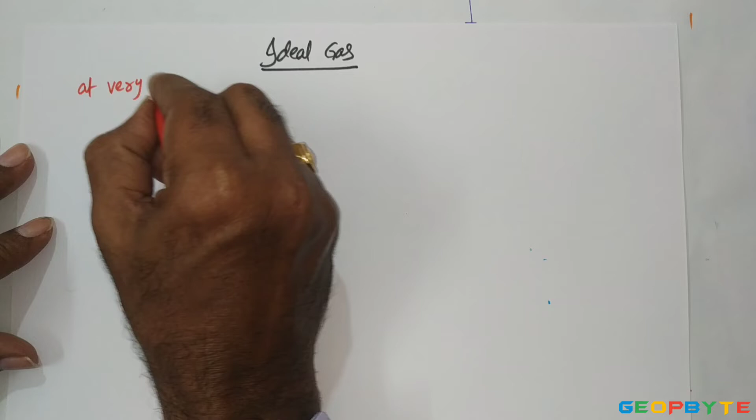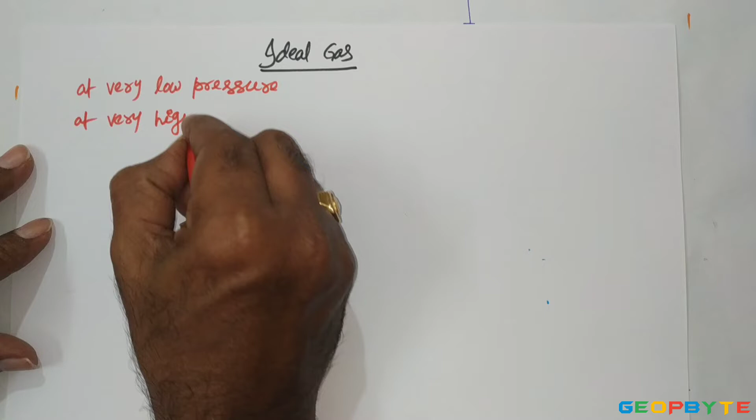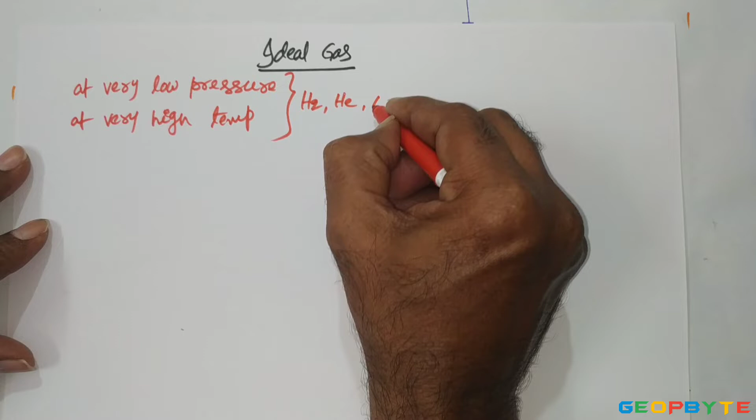But comparatively at very low pressure and at very high temperature, there are certain gases like hydrogen, helium, nitrogen, oxygen, argon and atmospheric air. These 6 gases maintain behavior very similar to ideal gas.

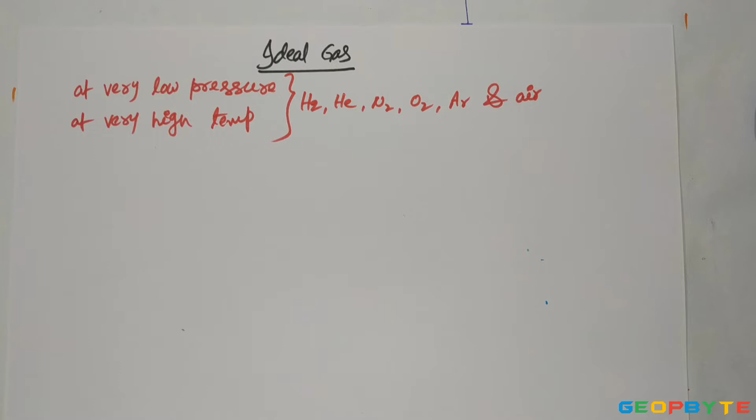Remember, these gases' behavior is very similar to ideal gas behavior only at very low pressure and very high temperature. But if I take these gases either at NTP, normal temperature and pressure, or STP, standard temperature and pressure, the behavior of these gases is also very similar to real gas. So anyhow, comparatively at very low pressure and at very high temperature, hydrogen, helium, nitrogen, oxygen, argon and atmospheric air maintain behavior very similar to ideal gas behavior.

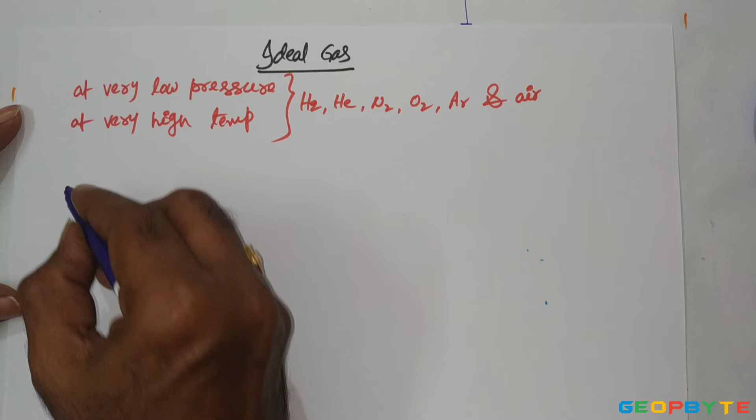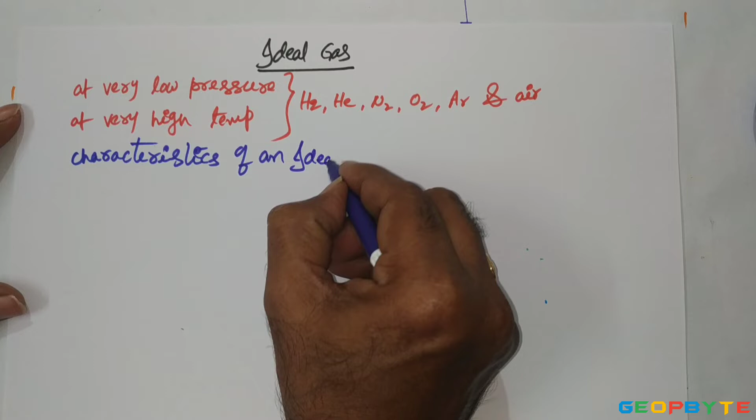Now let us discuss the characteristics of ideal gas. Characteristics of an ideal gas.

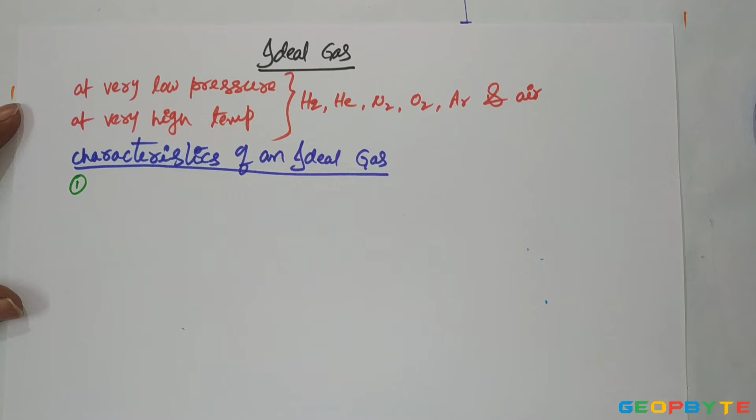The first character is that the molecular force of attraction is 0 in the ideal gas. That means ideal gas molecules are maintaining 0 attractive force or 0 cohesive force.

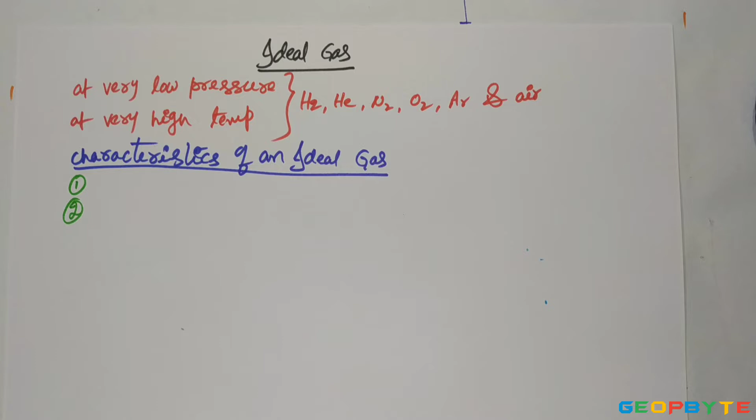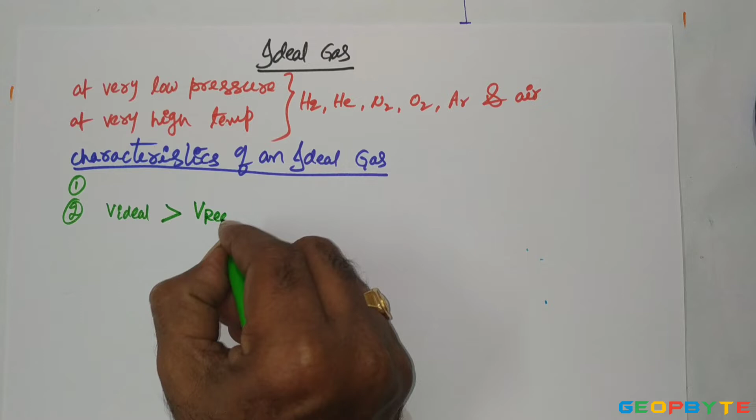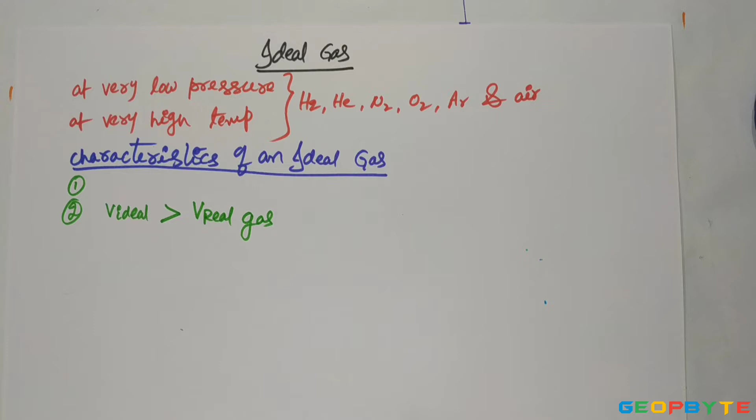Second character: since the ideal gas molecules are maintaining 0 controlling force or molecular force of attraction is 0, the molecules present in the ideal gas are very freely migrating from one location to another location. Because of that free migration, the volume occupied by ideal gas is always more than that of real gas.

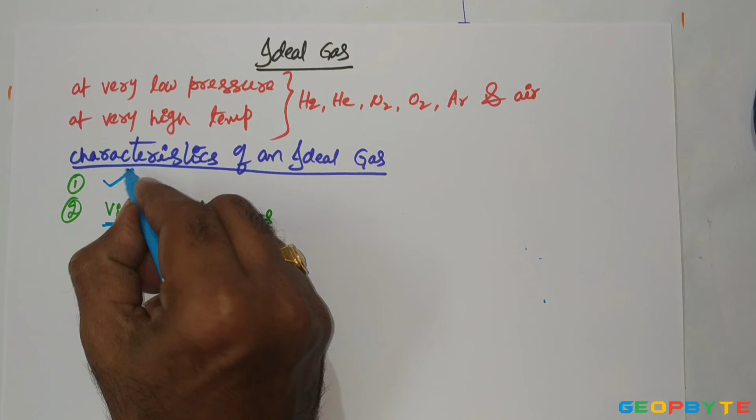First character is, there is no attractive force between the molecules of the ideal gas. Second character is, ideal gas is maintaining more volume than real gas.

Next character: by the time the ideal gas molecules are freely migrating from one location to another location, the molecular collision rate is more. That collision rate is developing some resisting force. That resisting force per unit area is called pressure. The pressure maintained by the ideal gas is more than that of real gas. Because of the free migration in the ideal gas molecules, the collision rate is more, and that collision develops some resisting force between the gas molecules, which per unit area is called pressure. The pressure developed by the ideal gas is always more than that of real gas.

Remember, in the ideal gas, if molecular force of attraction is beginning, the pressure of that gas is decreasing. Very important point. Next character.

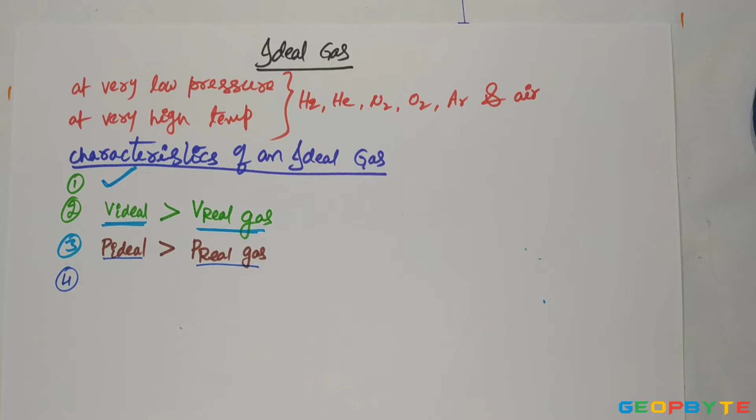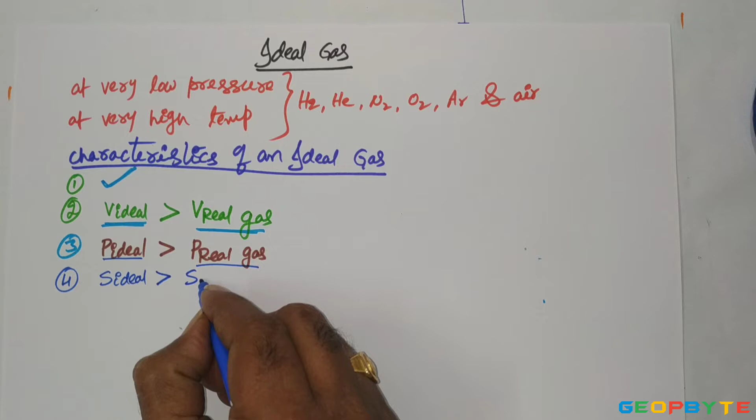Because the molecular force of attraction is zero in the ideal gas, the molecules present in the ideal gas move more disorderly, meaning the entropy maintained by the ideal gas is always more than that of real gas. That is the fourth character. Since the molecular force of attraction is zero, the molecules migrate more freely and disorderly from one location to another, and because of that free migration with a more disordered manner, the entropy maintained by the ideal gas is always more than that of real gas.

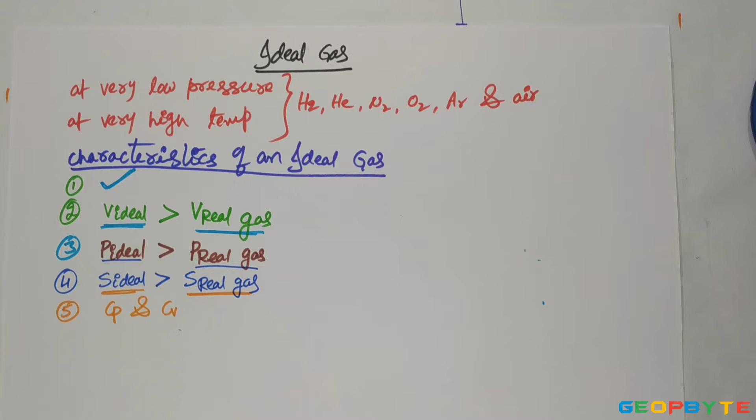Next character: the ideal gases can maintain constant specific heats, namely specific heat at constant pressure and specific heat at constant volume. Once again, ideal gases can maintain these constants irrespective of the pressure and temperature.

Next character, the last one: ideal gases never undergo phase change. Let us take water as an example. If I keep heating the water, initially the temperature of the water increases until it reaches the boiling point.

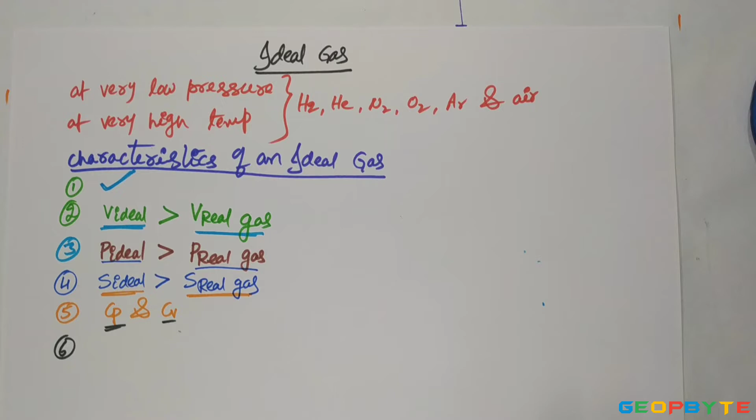But once the water reaches boiling point, because of further heating, water starts evaporation. Evaporation is the phase change from liquid to vapor. Such kind of phase change never occurs in the ideal gas under normal conditions. No phase change in the ideal gas under normal conditions.

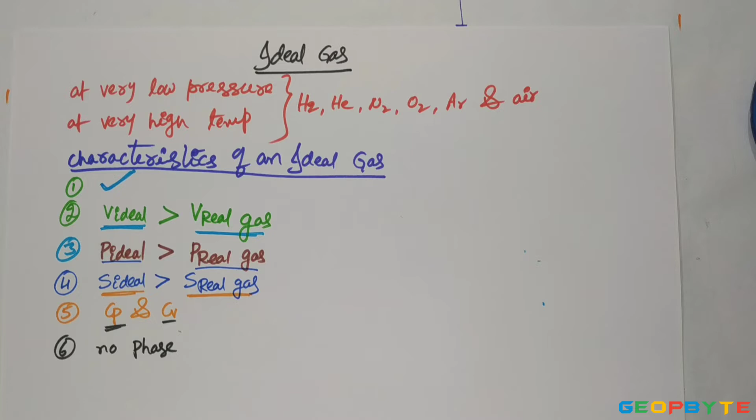So these are all the characteristics of the ideal gas. Now let us discuss the important laws for ideal gas. Important laws for ideal gas are Boyle's law, Charles' law, Joule's law, Regnault's law, Avogadro's law. These are all the ideal gas laws. If any gas is satisfying all these gas law principles at any temperature and pressure, that gas is treated as ideal gas or perfect gas.

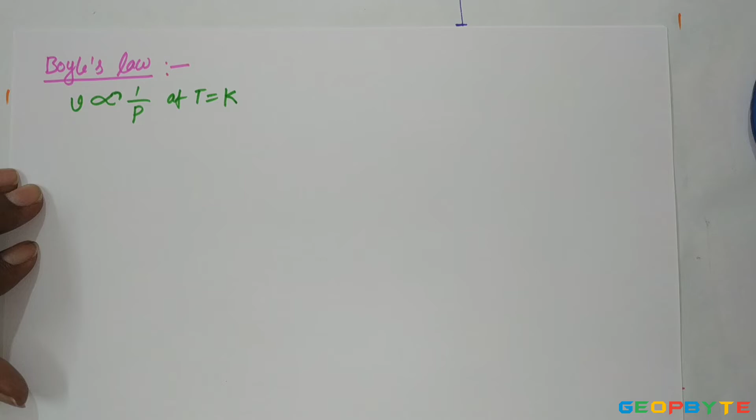The very first law is Boyle's law. Boyle's law states that the volume of the given mass of an ideal gas is inversely proportional to its absolute pressure when the temperature is maintained constant. It means if we can maintain the constant temperature for any ideal gas, volume is always inversely proportional to pressure. From this I can write that pressure multiplied by volume is proportional to 1, or pressure multiplied by volume is equal to a constant.

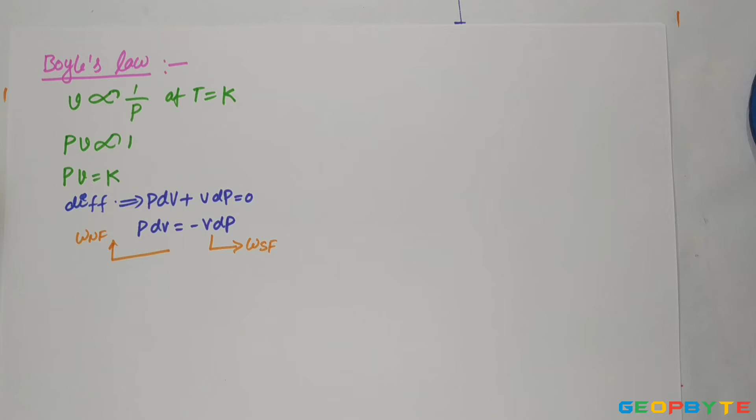That means product of pressure and volume remains constant for an ideal gas at constant temperature. From this, if I differentiate it on both sides, I am getting PdV plus VdP is equal to 0, or PdV equal to minus VdP. As we know, PdV is the non-flow work part, minus VdP is the steady flow work part. From this, the moral is non-flow work and steady flow work: this part is equal to non-flow work part, this is the non-flow work part, whereas this is equal to steady flow work. The moral is both steady flow work and non-flow work are identical for isothermal process.

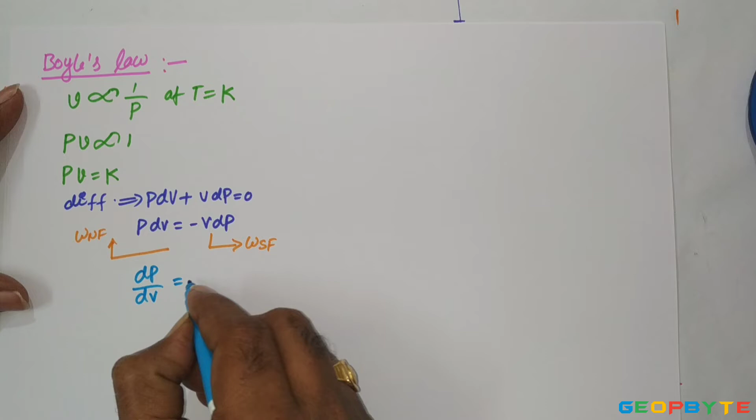Next, from this I can also write dP by dV is equal to minus P by V. The quantity dP by dV is the slope of isothermal curve with PV coordinate system. Once again, the quantity dP by dV indicates the slope of the isothermal curve with PV coordinate system. It is equal to minus P by V. The negative sign represents that isothermal process may support either compression or expansion.

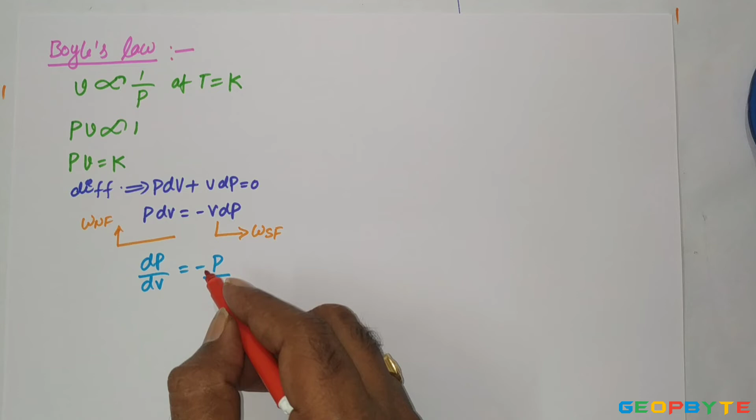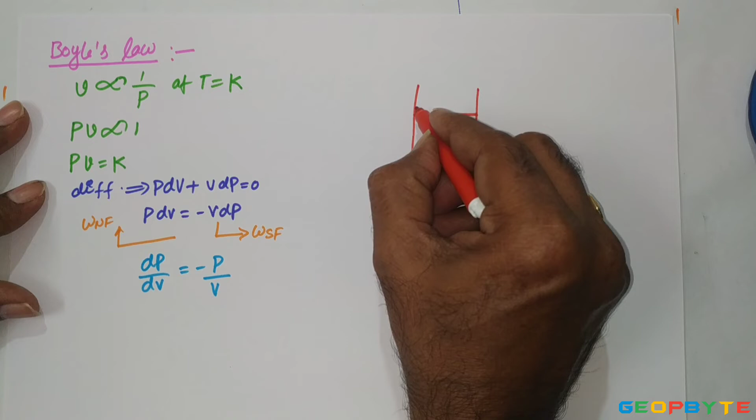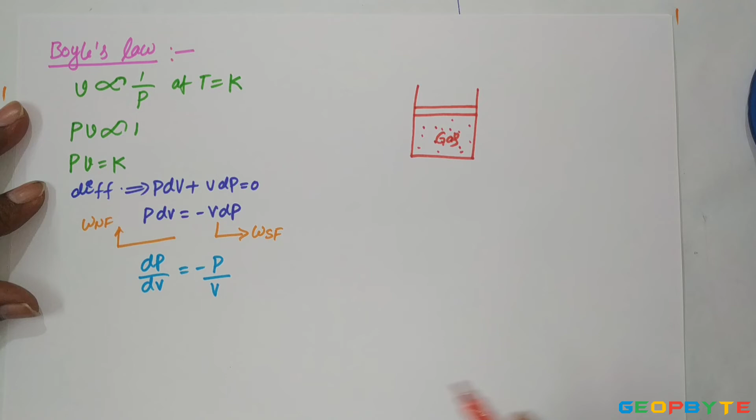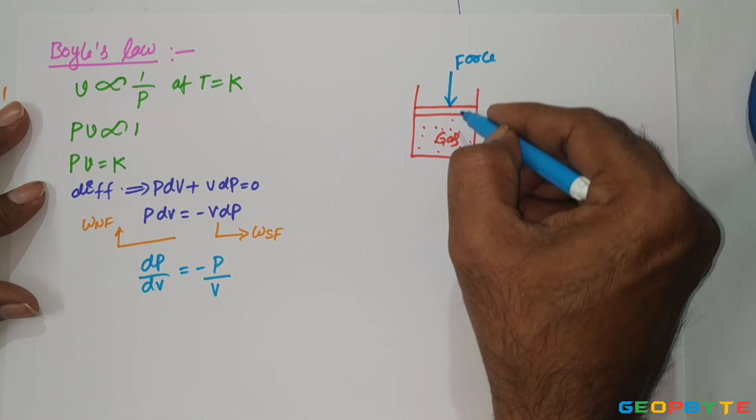Isothermal compression can be possible like this. Let us take the cylinder with piston mechanism. This space may be covered by some gas. Now, when I apply some external force on the piston, the gas below the piston is compressing. During the compression process, pressure increases. Along with pressure, temperature is supposed to increase. But if you want to maintain the constant temperature, you should arrange a cold source surrounding the cylinder. Let's see the water jacket or water source.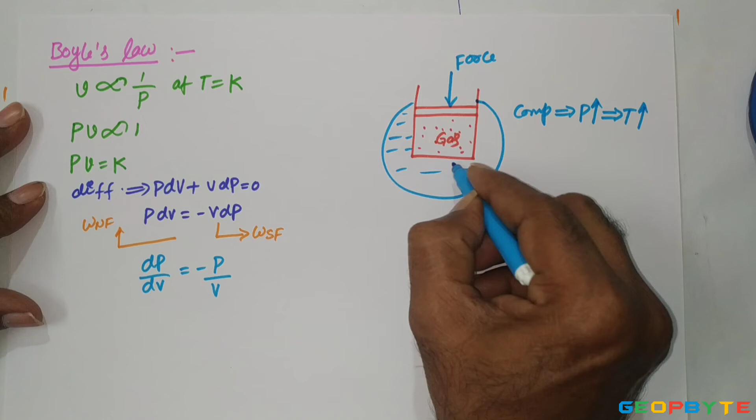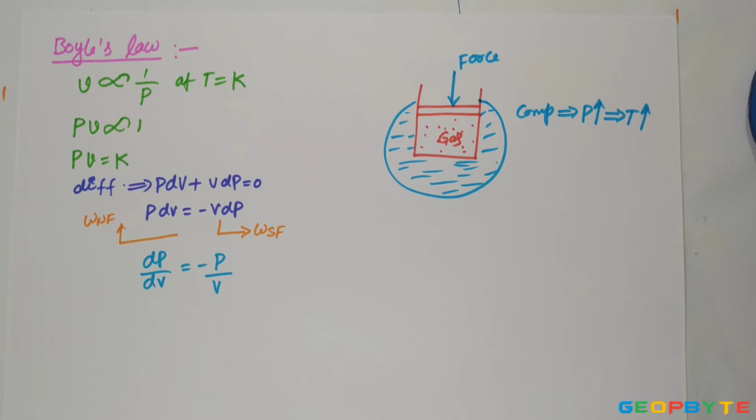In thermodynamics, hot source, cold source, hot body, cold body are four different terminologies. Hot source means the hot source is one that can give any amount of heat energy without dropping the temperature. Whereas hot body can give only a finite amount of heat energy, by dropping the temperature. Once again, hot source can give any amount of heat energy without dropping temperature. Example: sun. Even if you take infinite amount of heat energy from the sun, its temperature cannot decrease. Therefore, sun comes under hot source.

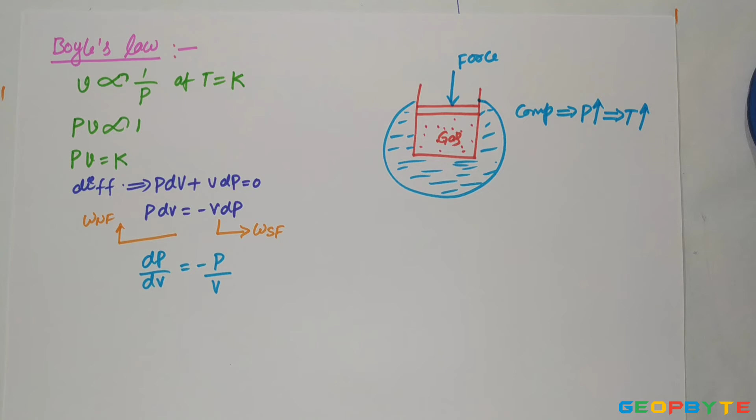Whereas hot body gives only a limited quantity of heat energy, and by that time the hot body's temperature decreases. Similarly, cold source is one that can receive any amount of heat energy without raising its temperature. Example: river water, sea water, atmospheric air, etc., because even if you dump a bucket of hot water in the river, the water temperature cannot be changed. Whereas cold body is one that can receive only a finite amount of heat energy, by raising its temperature.

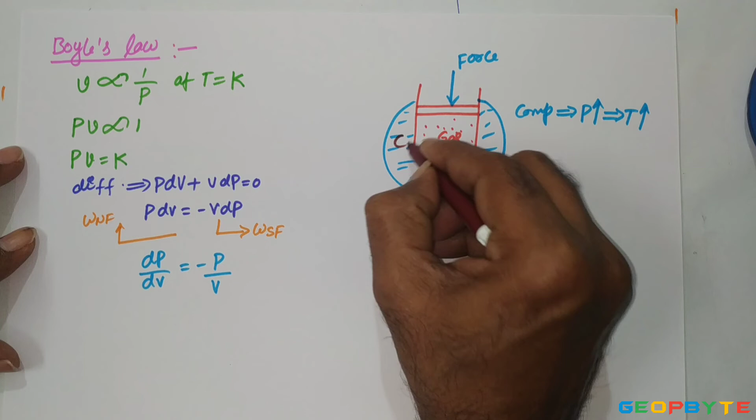Now, for compressing the gas at constant temperature, what I did is I provided water surrounding the cylinder. That water I am taking as cold source.

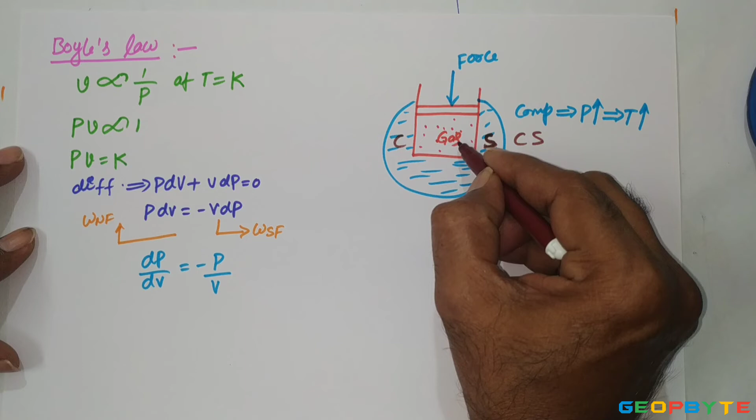By the time the gas is compressing, pressure of the gas increases, and along with pressure, temperature increases. Then the temperature of this gas may be more than the cold source temperature. This cold source is receiving heat energy from the compressing gas. Once the cold source receives the heat energy from the compressing gas, the gas temperature decreases.

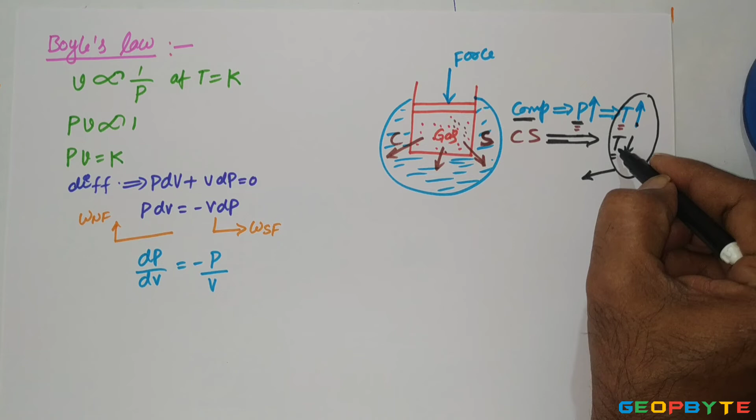Once again, during the compression process, pressure increases and along with pressure, temperature increases. But I provided cold water as a cold source. During the compression process, the compressing gas is dumping heat to the cold source, so the gas temperature decreases. The combined effect of increase in temperature by compression and decrease in temperature by the cold source may be maintaining a constant temperature. So the moral is: isothermal compression, or constant temperature compression, is possible by adding a cold source.

Similarly, if you want to expand the gas isothermally, at constant temperature, let us take the cylinder with piston mechanism. By the time the piston is moving up, the gas along with the piston is expanding. During the expansion process, pressure decreases, and along with pressure, temperature is supposed to decrease. If you want to maintain constant temperature during the expansion process, you provide a hot source surrounding the cylinder, such as hot water. By the time the gas is expanding,

along with pressure, temperature decreases, but the hot source I am connecting is giving some heat energy to the expanding gas. Because of the hot source effect, the temperature of the gas increases. Temperature of the gas increases by the hot source, while during the expansion process temperature decreases. The combined effect may be maintaining the constant temperature. That is how constant temperature can be maintained during the expansion process by adding the hot source, and during

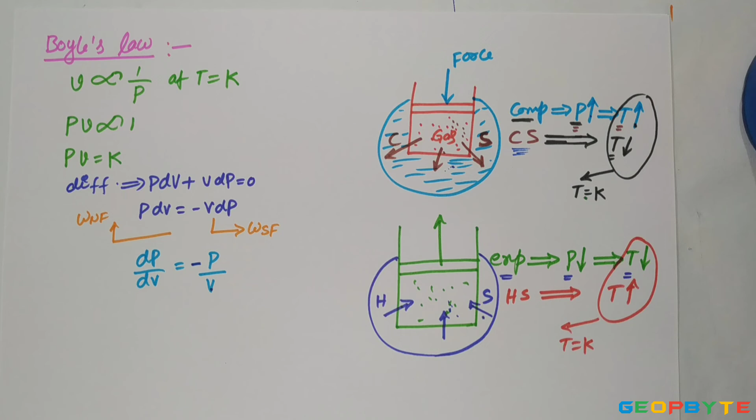Now, the isothermal process may support either compression by adding the cold source, or expansion by adding the hot source. During the compression process, pressure increases but volume decreases, so the negative sign indicates that as pressure increases, volume decreases. Similarly, during the expansion process, volume increases but pressure decreases. So since pressure and volume at constant temperature are reciprocal, the slope of the isothermal curve is negative.

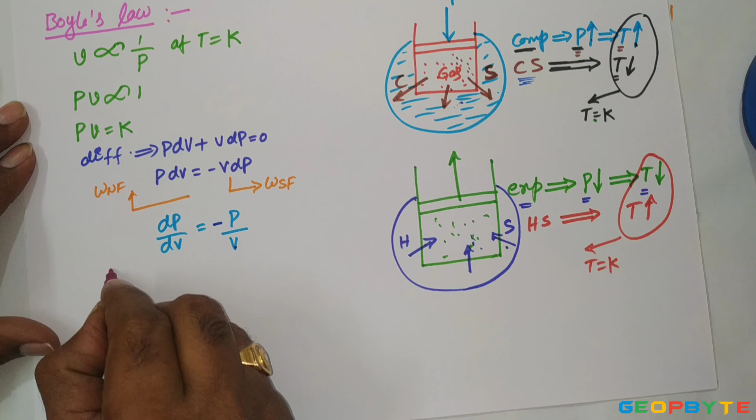Let us construct the PV diagram for the isothermal process, using a pressure versus volume coordinate system. For the compression process, let this be state 1. Before compression, the gas is maintaining large volume at low pressure. This is V1, the volume, and this is P1 before the gas is compressing. After compressing, the gas is maintaining less volume at high pressure.

That gives us P2. Now, the isothermal curve slope is minus P by V. If I join state 1 and state 2 with a slope of minus P by V, it looks like this - this is the isothermal curve. This isothermal curve, or the geometric shape of the isothermal curve, is very similar to a rectangular hyperbola. That is the reason the isothermal process is also called a hyperbolic process.

Once again, if I join state 1 and state 2 for the compression process with a slope of minus P by V, the process curve is very similar to a rectangular hyperbola. That is the reason the isothermal process is also called a hyperbolic process. That is about the 1 to 2 isothermal compression process.